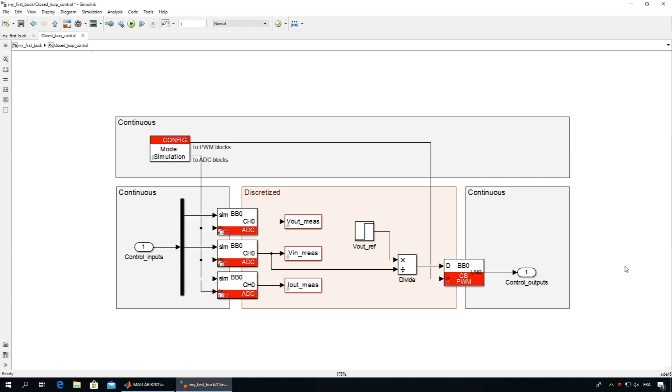The interfaces between the two worlds are the library blocks, which represent the physical interface of the B-Box or B-Board controller. With the ACG SDK library, the execution rates are automatically defined in the whole model, according to the interrupt parameters in the configuration block, so you don't need to define them by hand. However, it is always good practice to check that everything has been interpreted correctly before running the simulation.

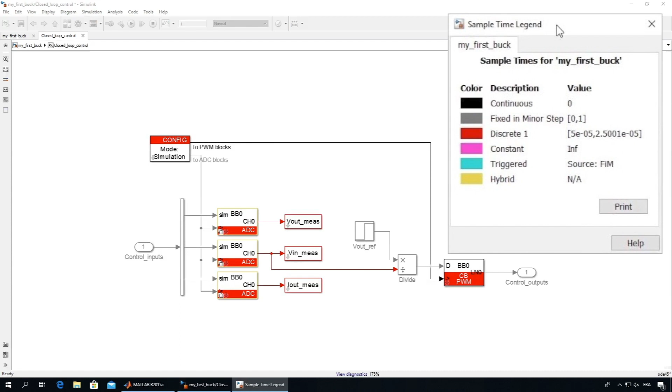To do so, Simulink can display color coding representing the different sample rates that it will use. So you can go to Display, Sample Time, Colors, and the legend appears. In this model here, we've got continuous signals in black and gray, and we've got discrete signals in red. The red sample time corresponds here to the execution rate of the main interrupt, previously set to 20 kHz or 50 microseconds, with an added phase shift to represent the default sampling phase of 0.5.

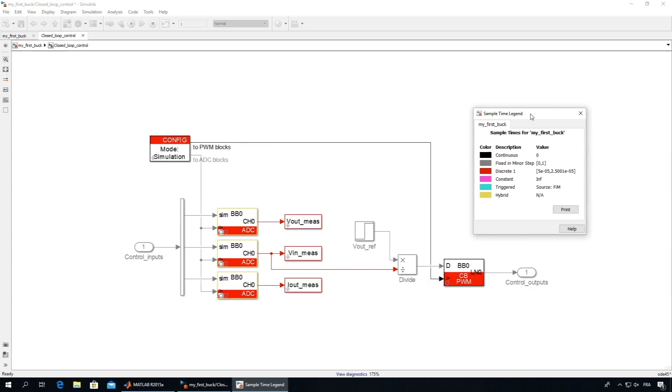If we look at the whole model, we can see that the physical signals are indeed continuous and the control algorithm is indeed discrete. The only issue here comes from the step block, which by default sets its sample time and thus the resulting computation to continuous. This is of course unwanted here, as the step represents a change in one of the controller variables, and it should be refreshed at the interrupt rate.

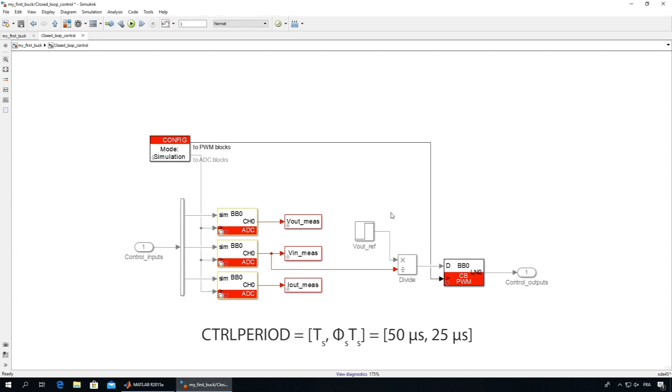To fix that, we can simply set the sample time of this block to the predefined global variable control period, which can be used anywhere in the model and whose value is a vector with the sampling period and the sampling phase. If we update the diagram by pressing Ctrl D, Simulink updates the colors, and we can see that now the whole control algorithm has the proper discrete rate.

A last thing before running the simulation, we will add several scopes to display the simulation results. And what we want to display here is the measured output voltage, along with its reference value to verify the reference tracking ability of our control, and the measured output current to illustrate the effect of the sampling phase.

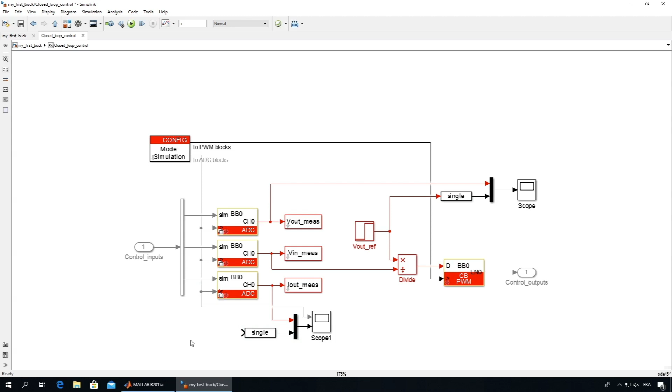To be able to display the output current ripples, in addition to the sampled value, we will scope the current measurements directly at the output of the plant. So this is somewhat equivalent to connecting a current probe at the output of the converter and displaying its measurement on an oscilloscope.

Note here that I'm using two data type conversion blocks to make sure that the data types of the muxed signal match. If not used, this will lead to a data type mismatch error. Finally, I will reduce the simulation time to 100 milliseconds to simulate only the time window that we're interested in. Now we can run the simulation by clicking the Run button.

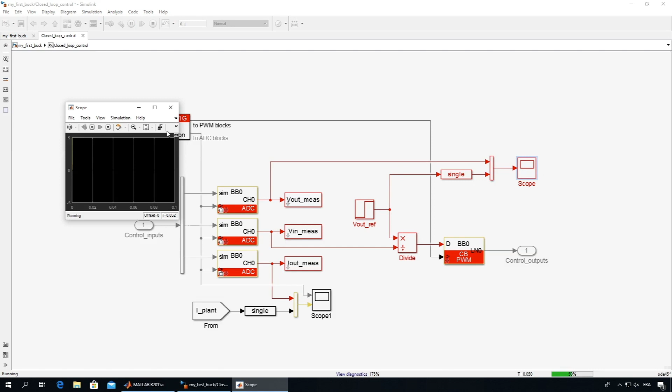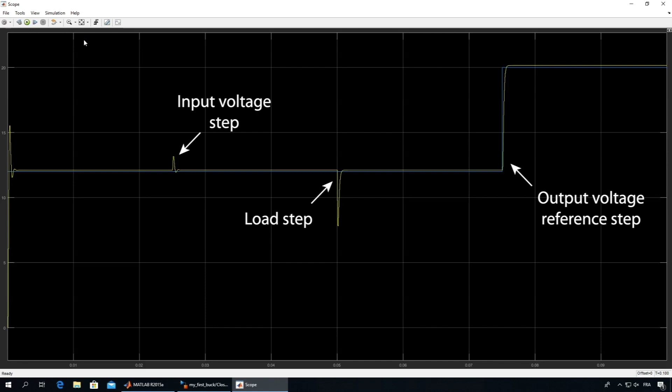If we look at the output voltage in yellow, we can see that overall it follows the desired value in blue. The first two perturbations come from a step in the input voltage at 25 milliseconds and the load step at 50 milliseconds. We can see that the control is able to reject those perturbations. Of course, the control dynamics could merit further studies, but this would require another control strategy, and this is beyond the scope of this video.

This graph also shows the behavior of the system under a reference step at 75 milliseconds, which the control is able to track. If we have a closer look at the measured voltage in steady state, we can notice that this is not exactly 12 volts. This is due to the plant output voltage, which is not perfectly flat due to the switching of the transistor, even if those oscillations are limited by the output capacitor. So depending on when the measured value is sampled, this can lead to a slight steady state error.

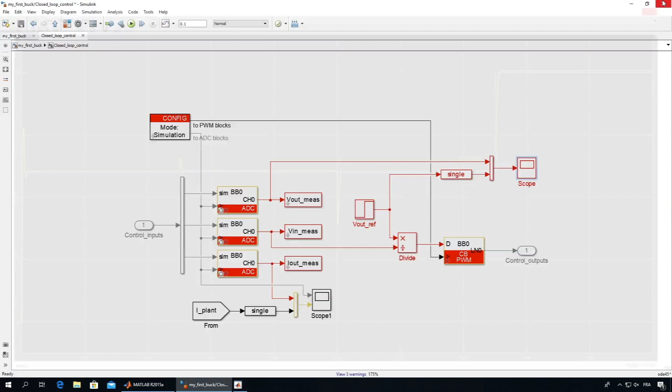Next, we can watch the output current of the converter. On the bottom graph, you can see the output current ripples in blue, as if measured by a current probe, and the sampled value in yellow. The blue signal is sampled on the rising edges of the sampling clock displayed in the top scope. As expected with a sampling phase of 0.5 and a triangular carrier, the current ripple is always sampled at its middle, even during transients. This gives direct access to the average value of the ripples without any oversampling or extra computations.

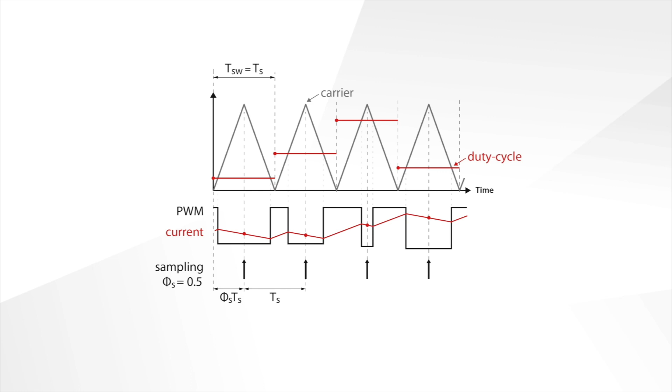In short, with a sampling phase of 0.5 and a triangular carrier with a phase of 0, this ensures that the sampling never occurs at the same time as the duty cycle is updated, namely at the 0 of the carrier, and this produces PWM pulses that are always centered around the sampling instants. These kinds of concepts are modeled accurately by the simulation models of the ACG SDK library and can thus be verified in simulation.

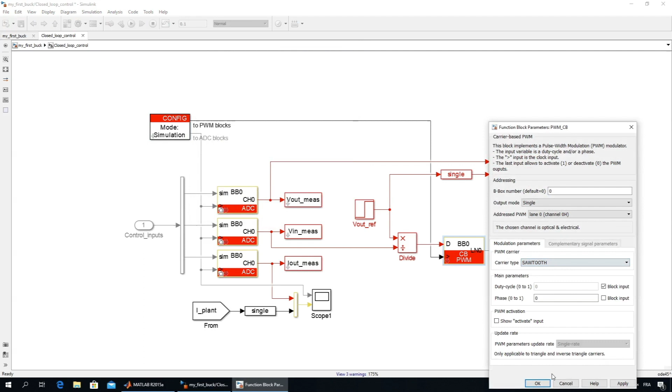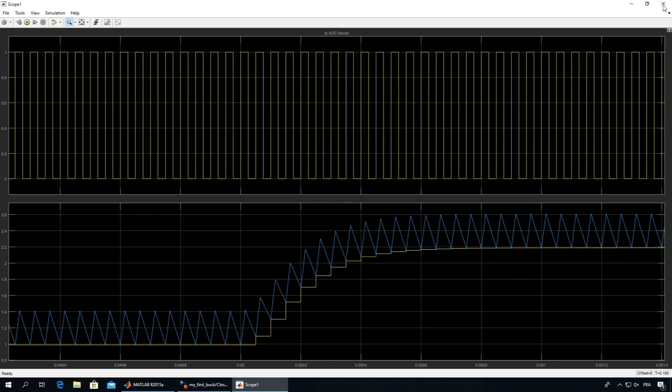It is clear that if we now change the sampling phase to, for instance, 0.2, the sampling will not occur in the middle of the current ripple, and the sampled current will no longer represent the average of the current ripples. Similarly, if we switch to another carrier shape, the ripple will no longer be sampled in the middle. For instance, with a sawtooth carrier and a sampling phase of 0, the bottom of the ripple is sampled. Likewise, with an inverted sawtooth, the sampling will get the top of the ripple.

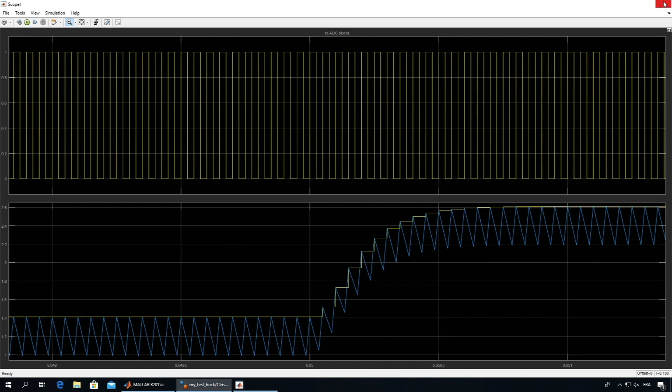Although this may be a nice feature of the sawtooth carrier, this has the clear disadvantage that the sampling is always done exactly on the switching edges, which can cause severe perturbations on the measured value. In contrast, sampling with a phase of 0.5, namely in the middle of the switching period, ensures that the sampling occurs far enough from the switching edges, and that at that time the induced perturbations are damped.

To sum up, thanks to the simulation, we've been able to verify that our control algorithm works as expected, and we've been able to understand the effect of various parameters. In the next video, we are going to see how to generate code from the same Simulink model and how to execute it on a B-Box controller to control a converter prototype.